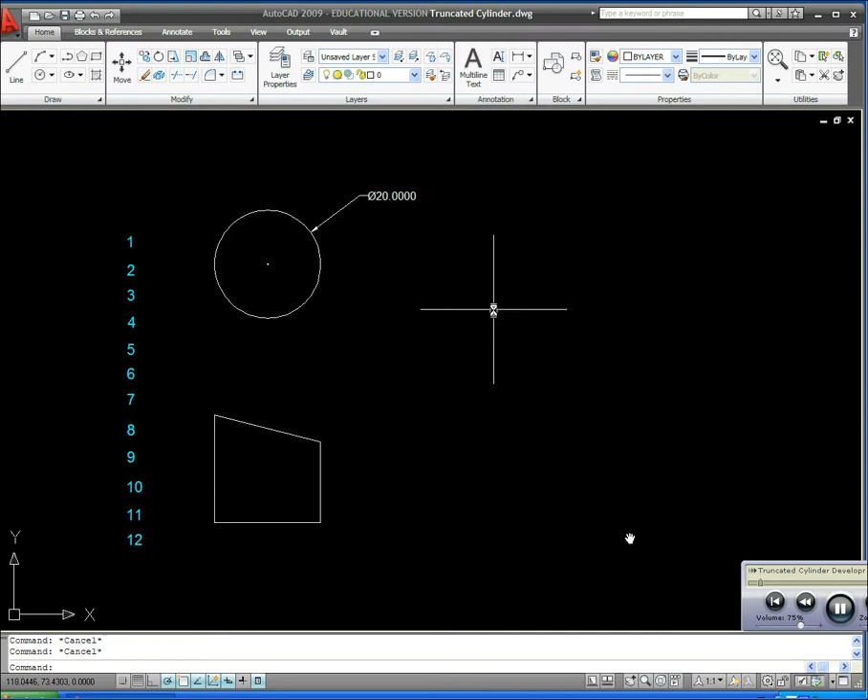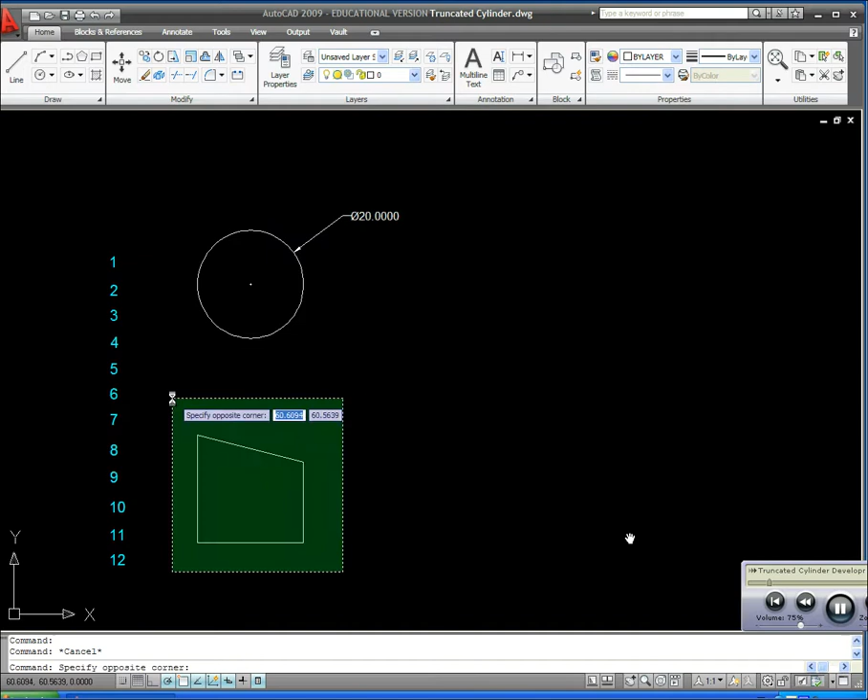Whatever technique you try, make sure you do it consistently every time. That way, if you make an error, it's easier to backtrack and figure out what went wrong. So as I said earlier, this is a truncated cylinder, and this circle is the top view, and this is the front view of the truncated cylinder. So we'll just get right into it.

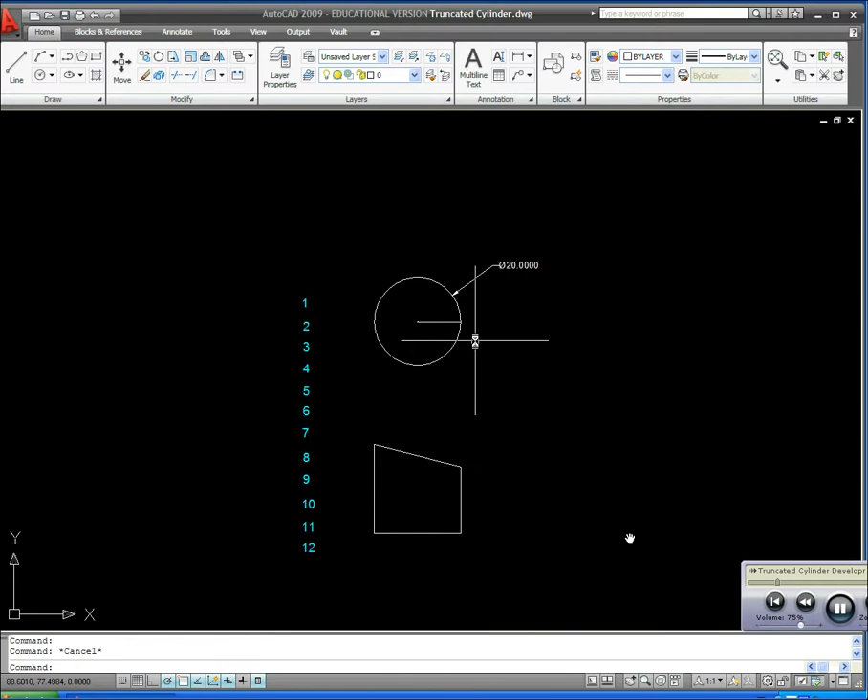So I want to start off at the center of the circle, and make sure you snap directly on the center. If you don't, it's going to mess up the rest of your drawing. So I'll just trim this off, and now you see I have a line extending from the center of the circle to the outside. And I want to type in AR and then enter for the array command, and I want to make sure I have a polar array since I'm working with a circle, and it tells me to select objects, so I'll select the line I just drew.

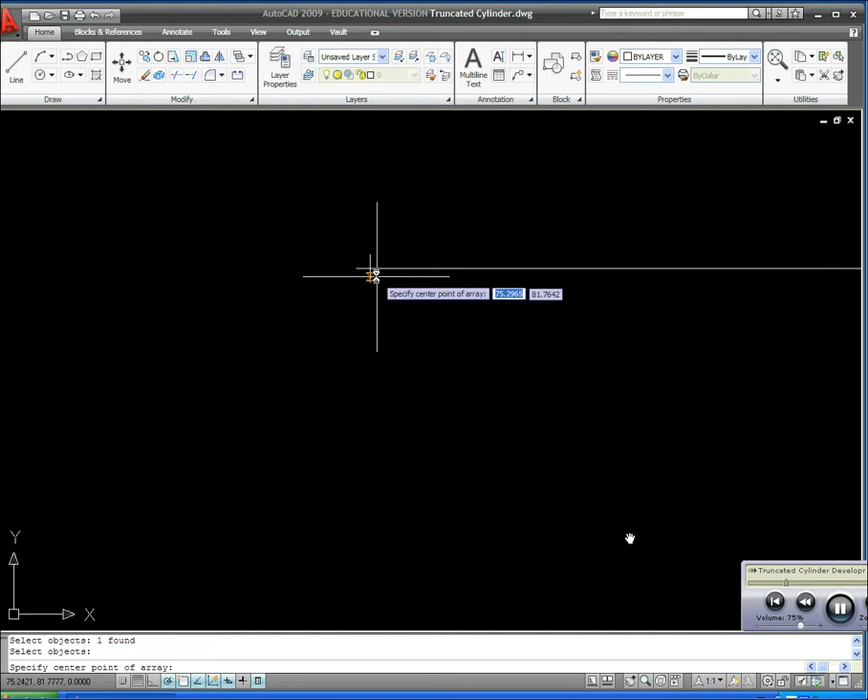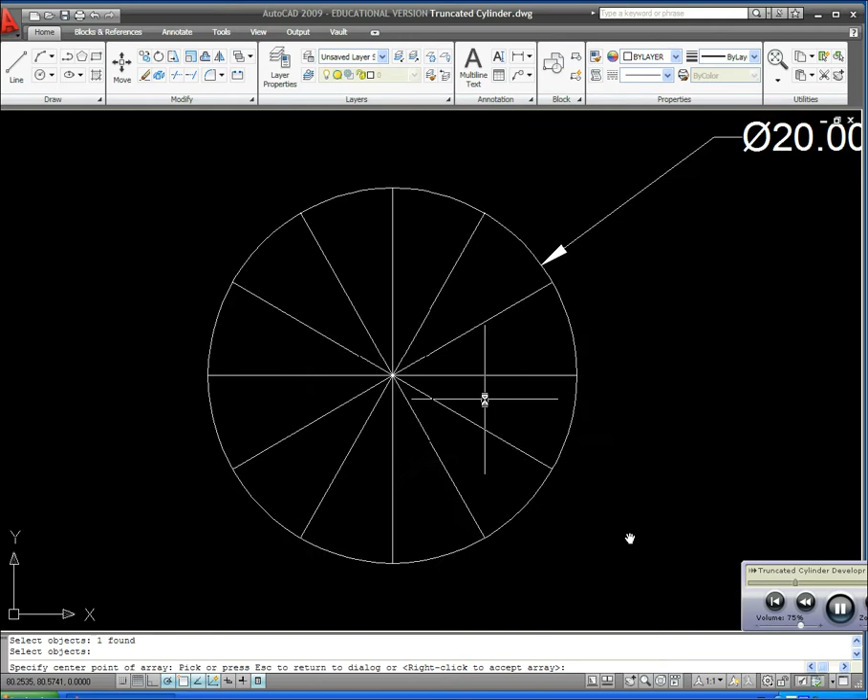Okay, and now I want to select the center point, and I want to zoom way in, make sure I get directly on the same point. Now it brings me back to the screen again. I want to have 12 items. This is not a written rule, but it's a good, easy number to remember. So just a dozen. Now I want to hit preview, and this is exactly what I wanted: different pie-shaped pieces. So I'll hit escape, and it'll bring me back to the screen. Then I'll click OK. So I accepted what the array command wanted to do.

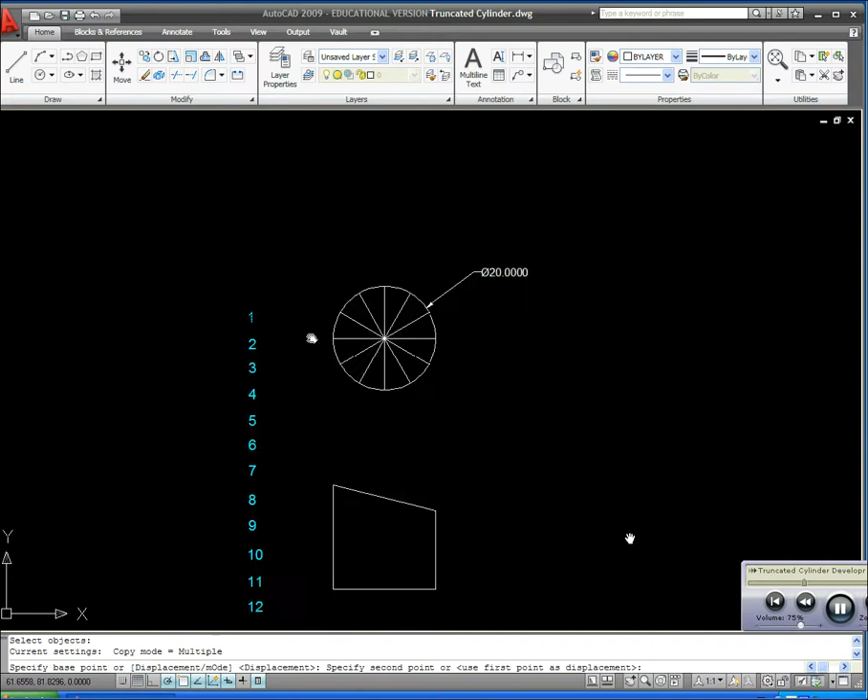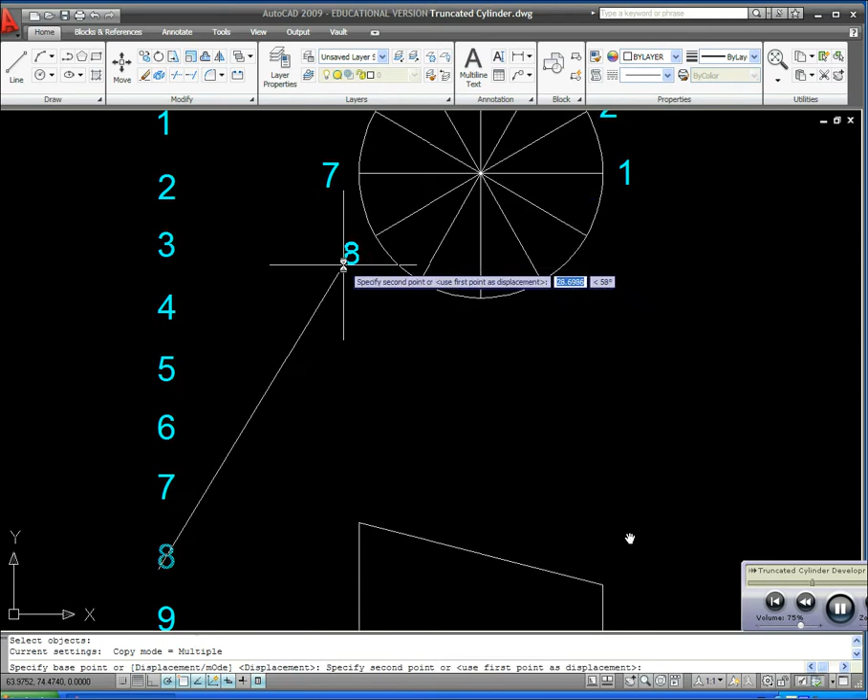So now you'll see that I have these numbers over here on the side already. I want to copy these around to where the numbers are at the end of the lines that I just drew. So I'll just go around the circle and do that very thing. And I know this seems like a slow and cumbersome process, but really the more practice you get, the quicker you'll be at it, and plus the more difficult the drawings get, you'll already be accustomed to going through the procedures. Okay, so now you can see that I have numbers at each one of the lines that extend out.

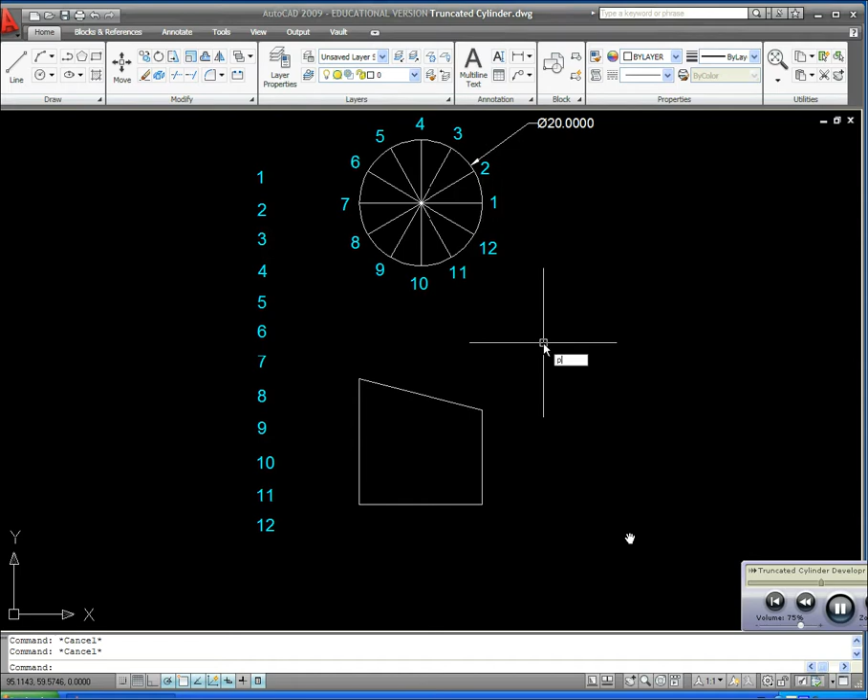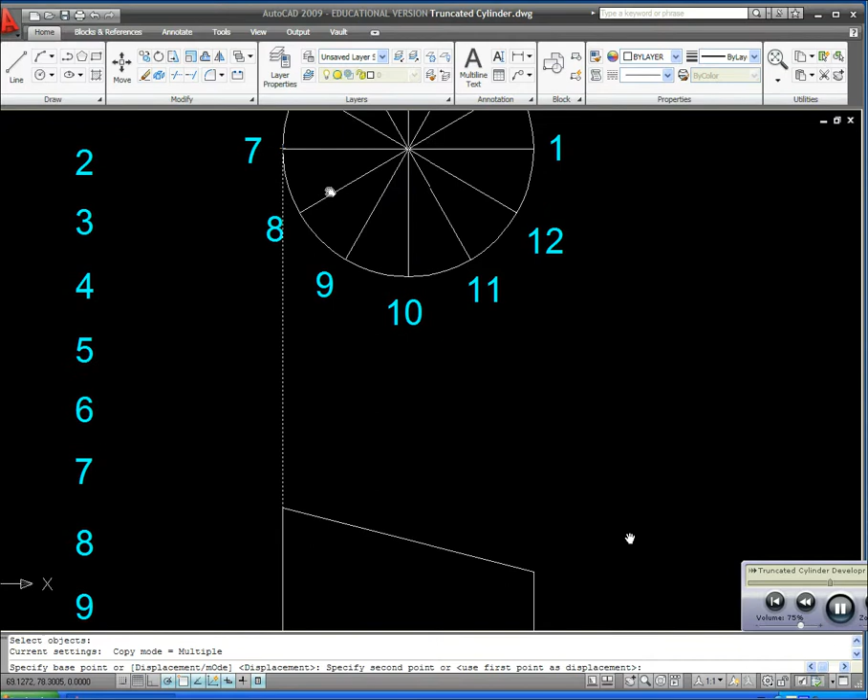I want to draw some lines down from the top view of the cylinder to the front view. The easiest way to do that: after you draw your first line, make sure it is exactly vertical. If you don't, it will again mess up the rest of your drawing. So just use the copy command and snap to the endpoints or the intersection of each of those lines in the circle. And you want to trim off any excess you have.

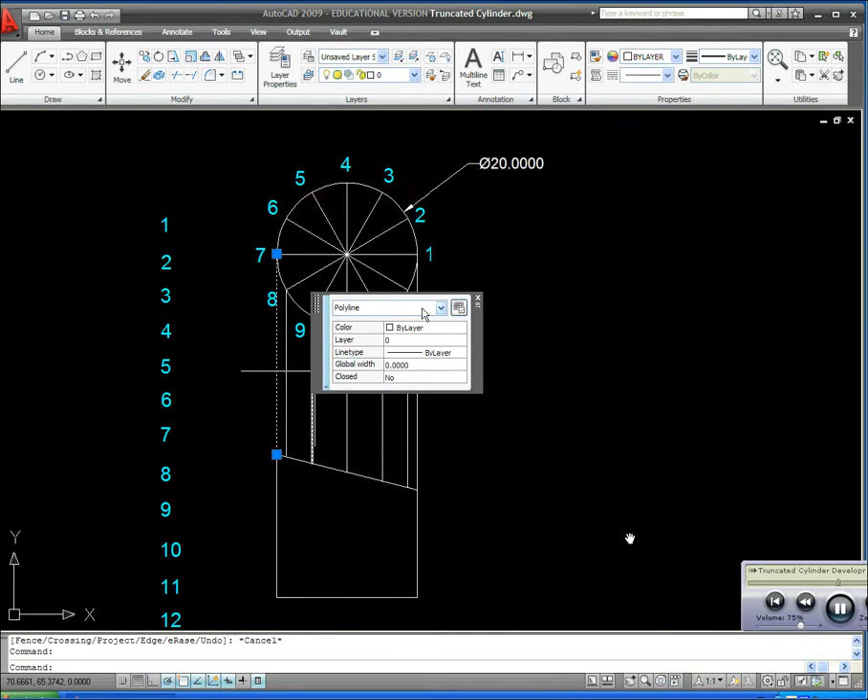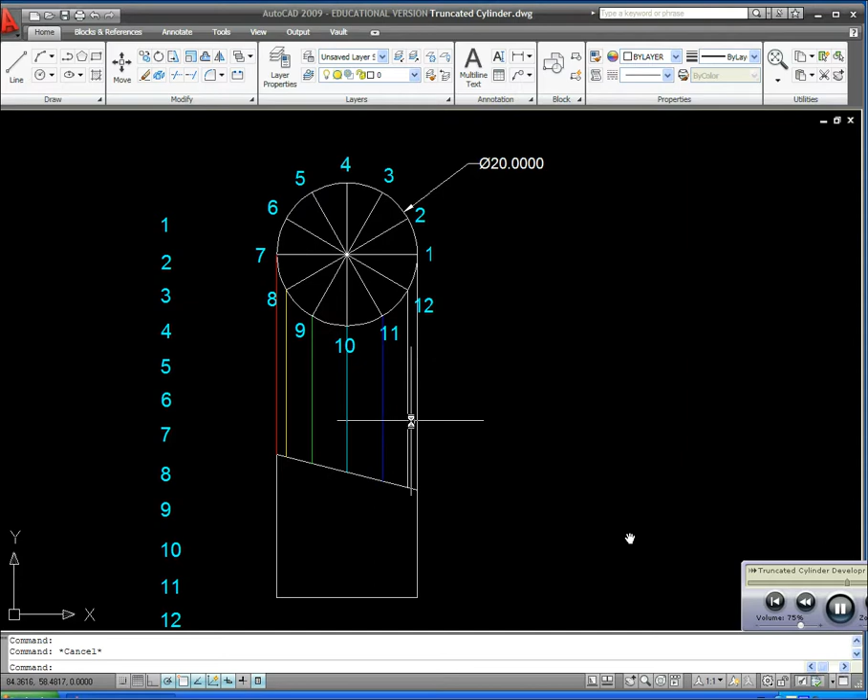Just like that. And to keep the drawing neat, and you'll see why we do this in a minute, I want to change the color of these lines and make them all different shades. That'll help out later on. Now I want to use the QuickCalc feature in AutoCAD, so I'll just type in QuickCalc. It brings up a little calculator for us to work with.

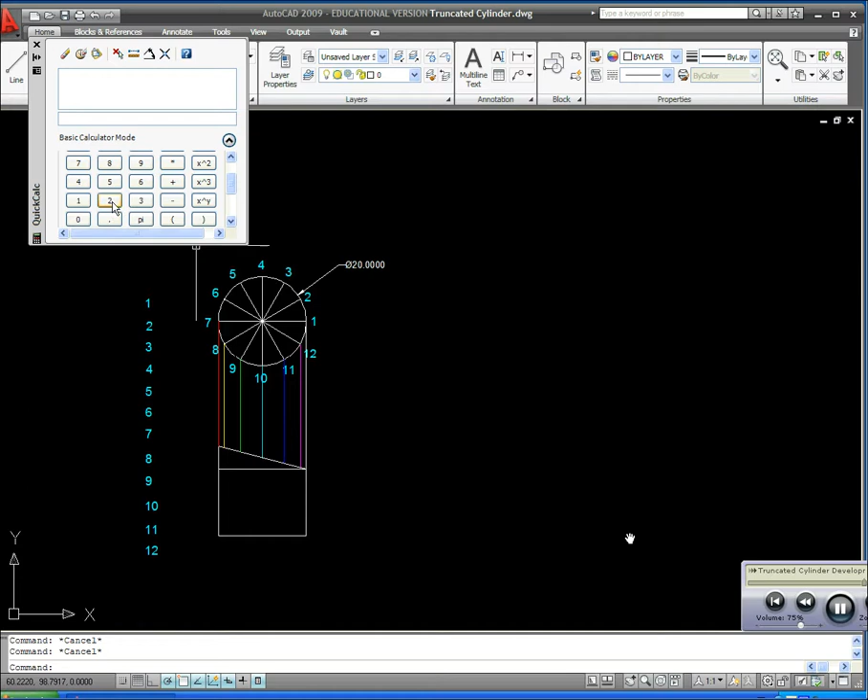Now imagine that if you were viewing this cylinder from the right side, and you just unrolled it along this edge, the unrolled length would be the circumference of the circle. So since I know the diameter, I can find the circumference, and that's my next step. You can use the calculator to help you. The circumference of a circle is 2 times pi times the radius. So it's 2, then multiply, which is asterisk, and pi is located here, and the radius, of course, is half the diameter.

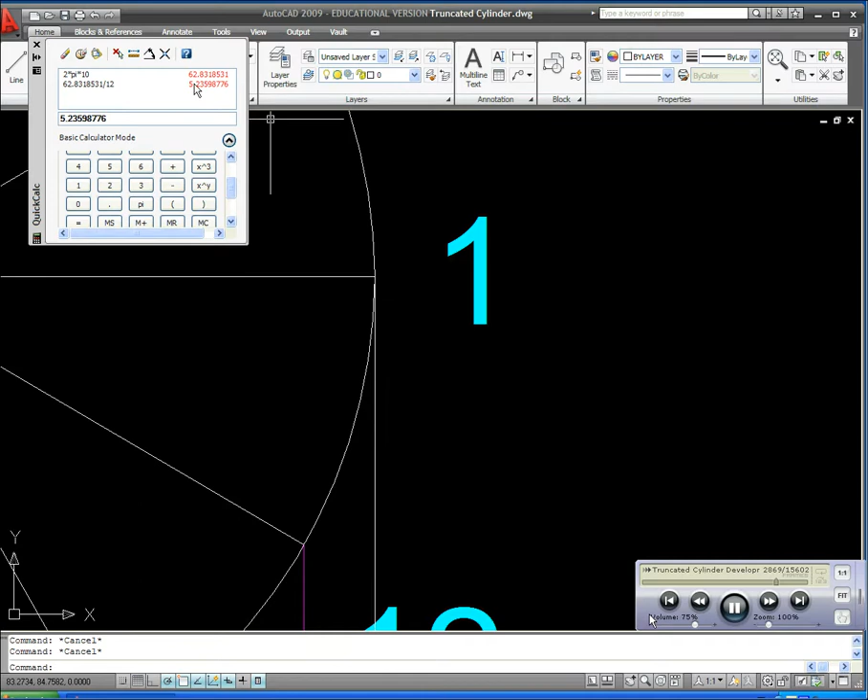So it's 2 pi times 10, hit enter, and it gives me 62.8318 and some change. Now I divided that top circle into 12 equal parts, so I want to divide that number by 12, and that is 5.23598. That's the arc length from this point to this point. So now I can start developing my pattern. I want to offset this by, I picked 15 in this case. You can pick whatever. But this will be your starting point.

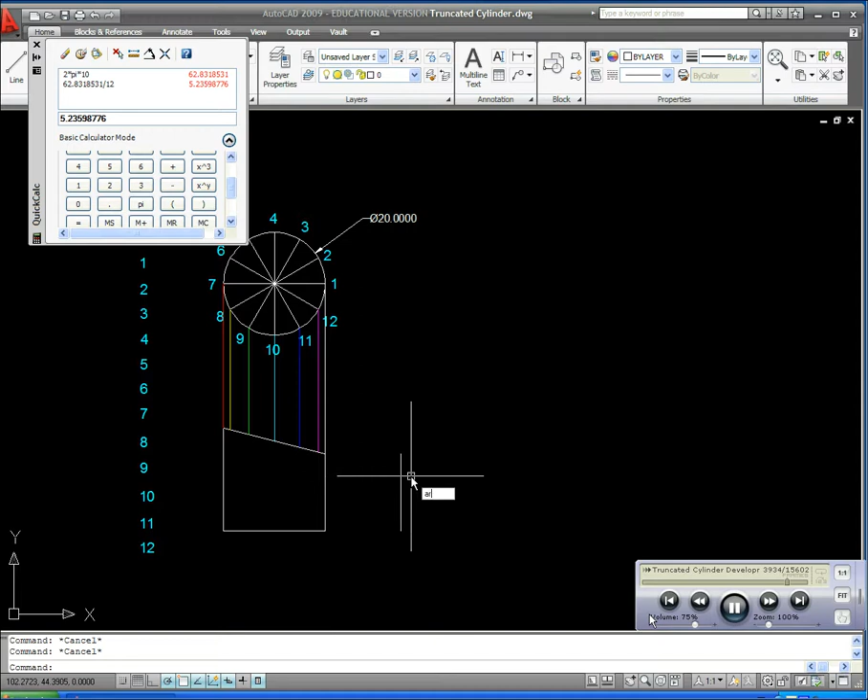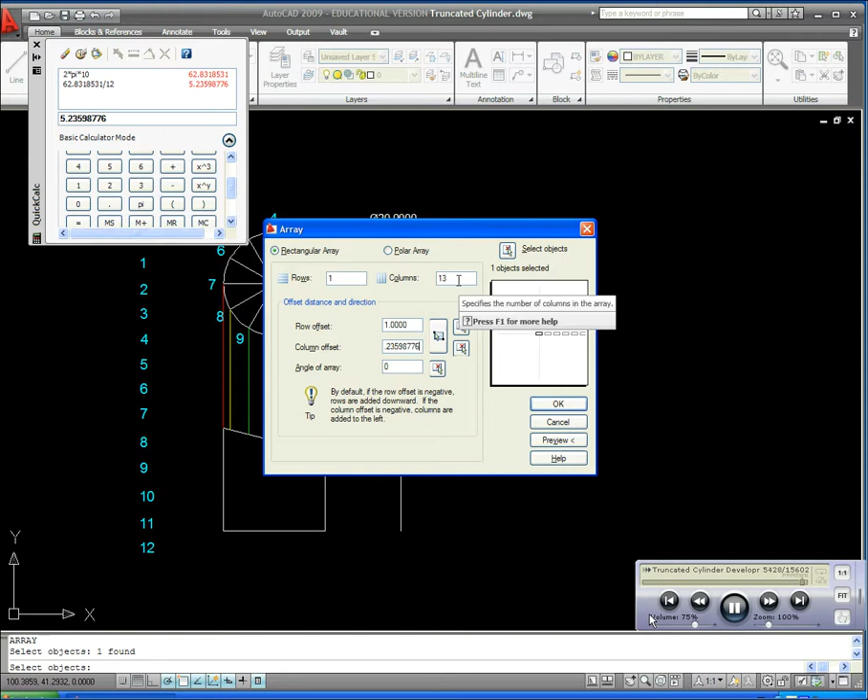Now I want to type in AR again for array, and use the array command to divide my pattern. This time I want a rectangular array, and I'll select the line I just drew. Now make sure you change your column offset to this amount, 5.23598776, and you'll see why in a minute. And you want 13 columns, and the reason 13 instead of 12 is because 13 vertical lines will create 12 spaces for you. Okay, so just